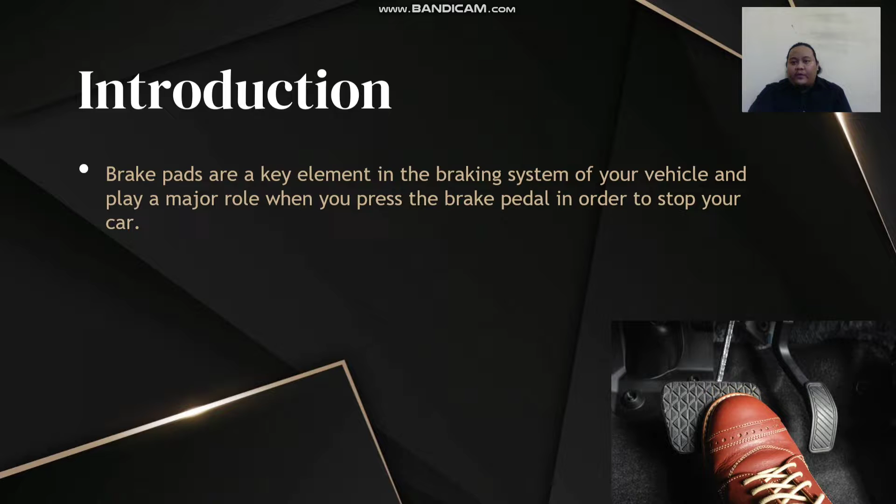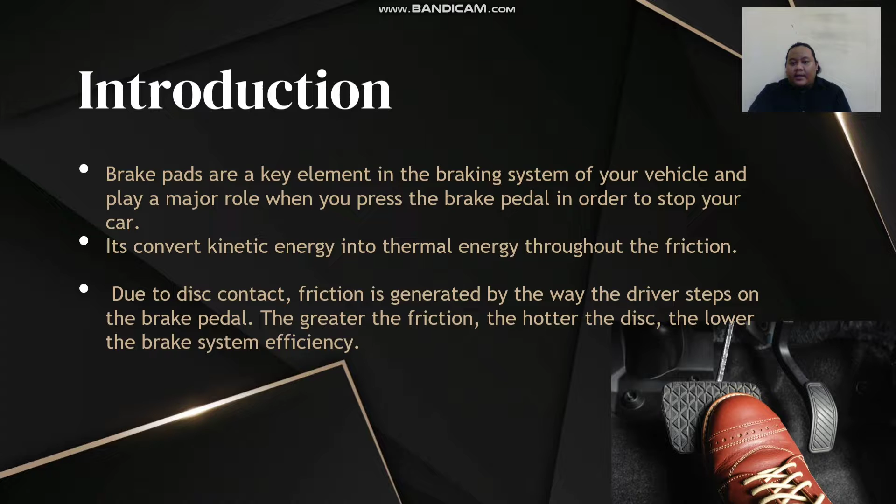Brake pads are the key element in the braking system of your vehicle, and they play a major role when you press the brake pedal in order to stop your car. It converts kinetic energy into thermal energy through friction. Due to disc contact, friction is generated by the way the driver steps on the brake pedal. The greater the friction, the hotter the disc, the lower the brake system efficiency.

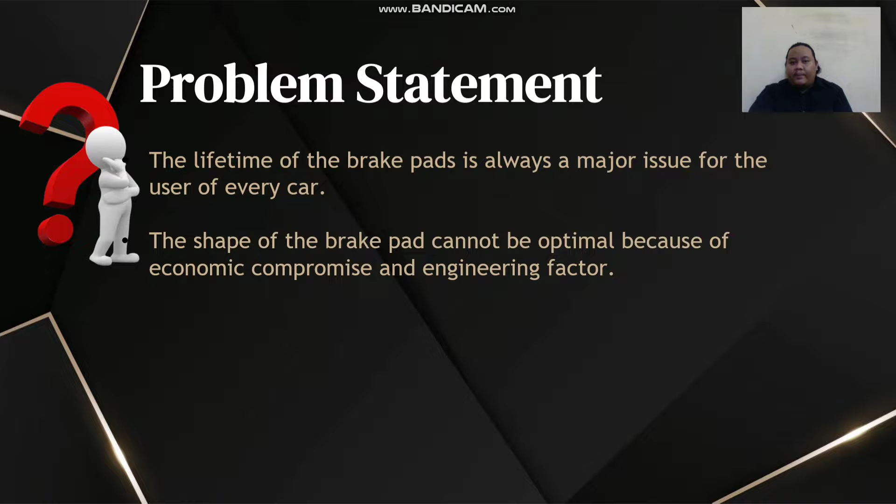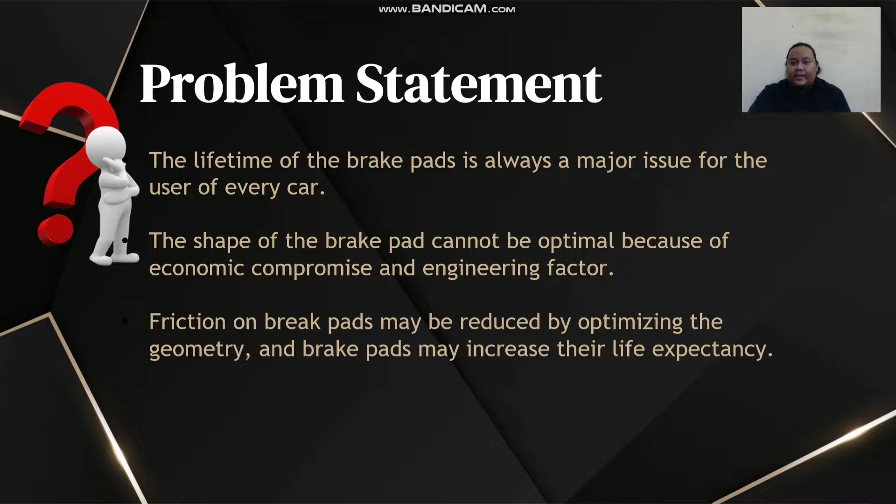Problem statement: the lifetime of the brake pad is always a major issue for every car user. The shape of the brake pad cannot be optimal due to economic compromise and engineering factors, and thirdly, the friction on the brake pads may be reduced by optimizing the geometry, which may increase the life expectancy of the brake pads. This project will analyze the 3D printed brake pad in terms of performance.

The objectives of the project consist of three. First is to design and analyze the lightweight 3D printed brake pad using CATIA software. Second is to fabricate the lightweight 3D printed brake pad using the SLS machine. Third is to analyze the performance of the lightweight 3D printed brake pad in the SIMSOLID software.

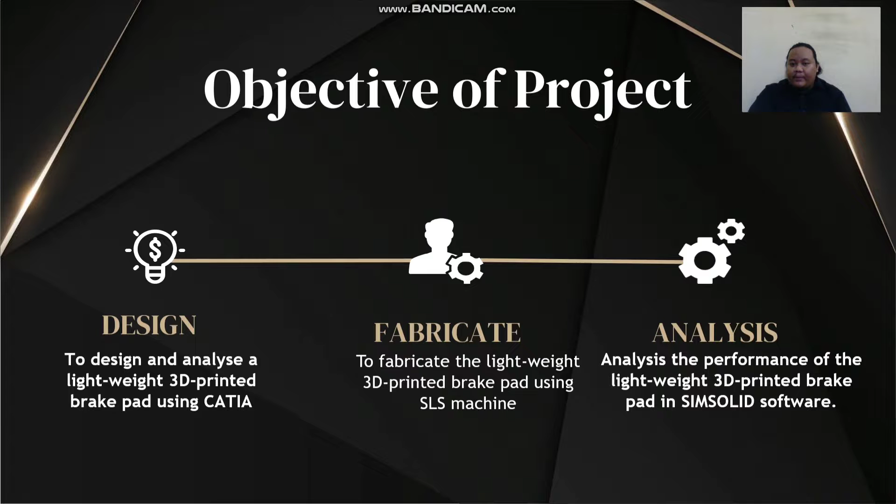Brake system: a braking system's purpose is to slow down and stop vehicle movement. Friction is the resistance to movement exerted by two objects against one another. In vehicle control, there are two types of friction: kinetic or moving friction, and static friction.

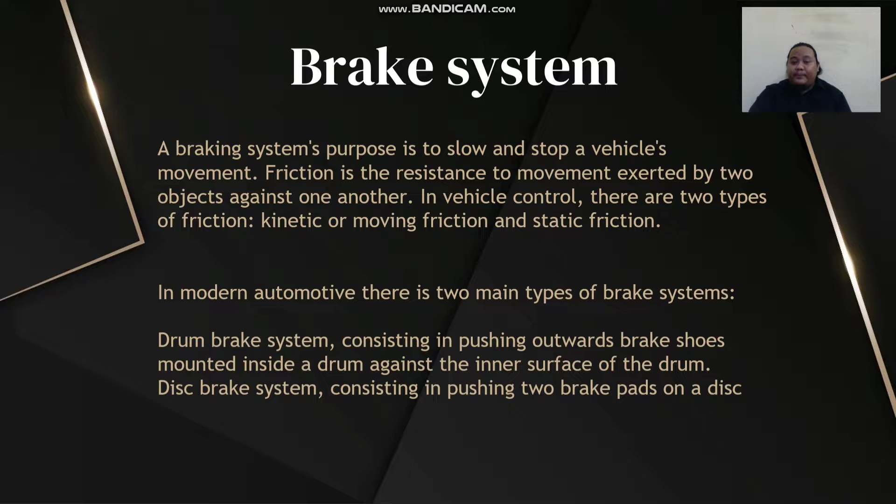In modern automotives, there are two main types of brake systems. First is the drum brake system, consisting of pushing outward brake shoes mounted inside the drum against the inner surface of the drum. The second is the disc brake system, which consists of two pads pushing on the disc.

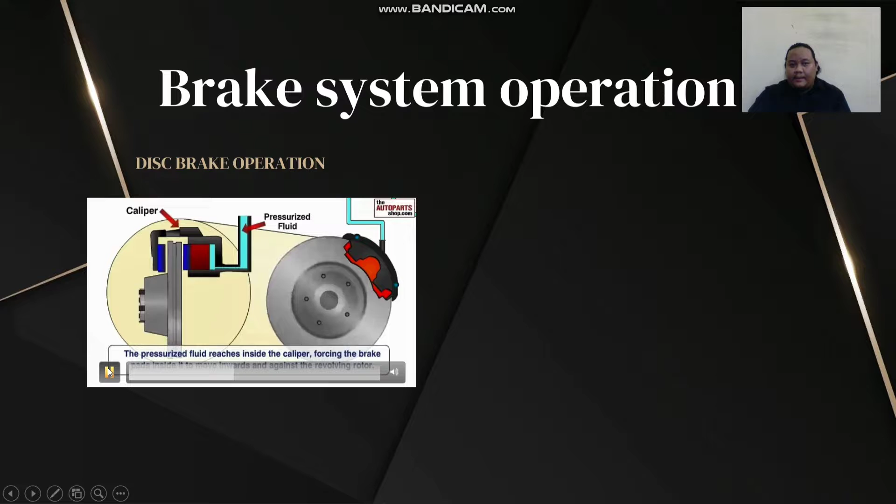Types of brake pad: there are many types of brake pads, such as semi-metallic, ceramic, non-asbestos organic, and low-metallic non-asbestos organic.

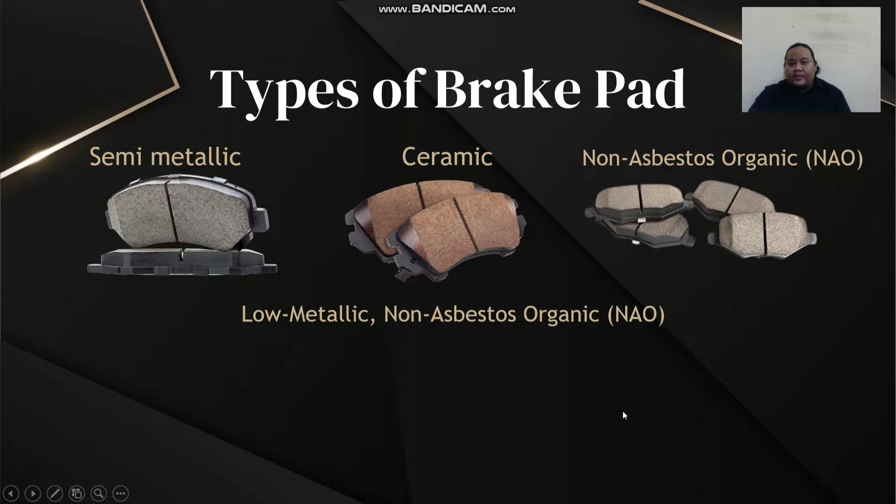Design and developing by using CATIA. General sketch for model: before designing the brake pad, the proper parameters must refer to the brake pad first. The CAD parts were designed to give a clear picture of what parameters need to be changed in order to reduce friction, using the real brake pad from a 1996 Proton Wira sedan.

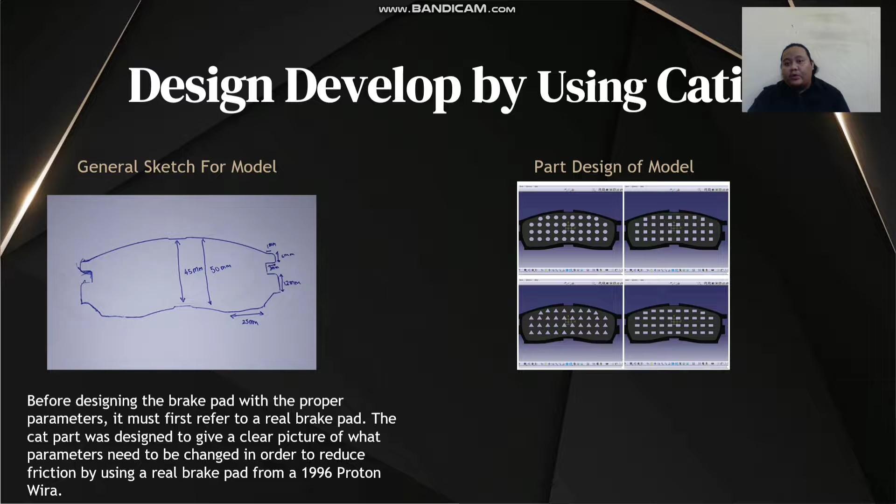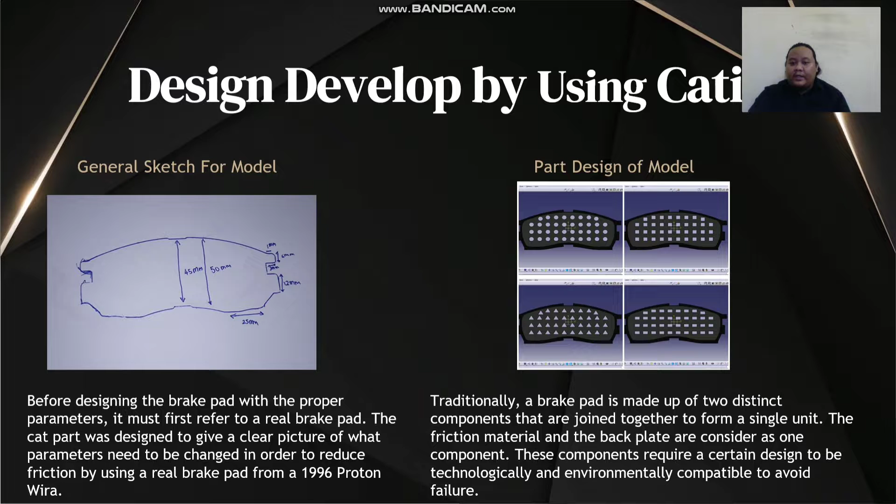Then we go to the part design of the model. Traditionally, a brake pad is made up of two distinct components joined together into a single unit: the friction material and the brake pad backing, which are considered as one component or one part in these CATIA parts. These components require a certain design to be technologically and environmentally compatible in order to avoid failure.

Fabrication of the model using SLS 3D printing. The printing process uses a powder bed that heats the powder just below the raw material's melting point, making it easier for the laser to raise the temperature of specific regions of the powder bed while tracing the model and solidifying parts.

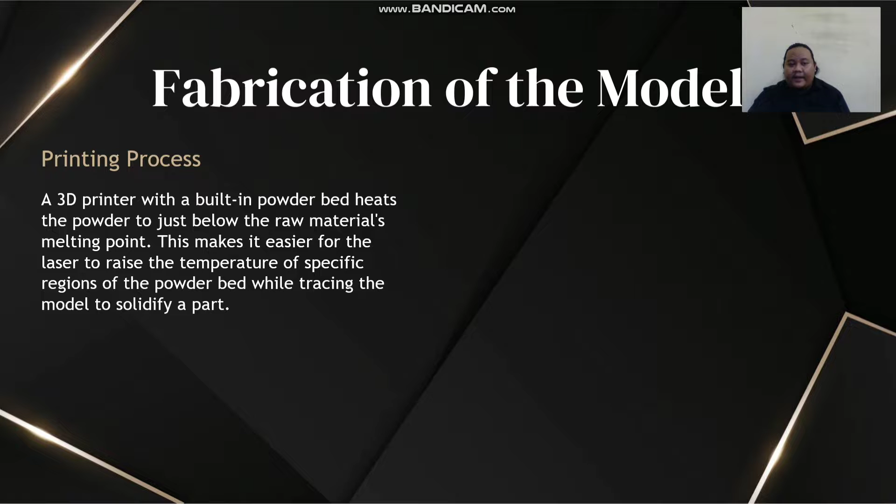The next process is cooling. The build chamber inside the 3D printer needs to be cooled slowly from the inside outwards after printing, to ensure optimal mechanical properties and to avoid warping in the parts. The exact cooling rate of each part is influenced by a number of factors, making it difficult to predict and measure. The last step of the preparation is the post-process.

After completing a printing job, remove the complete parts from the build chamber, separate them and clean them of excess powder. Typically, this process is carried out manually, at a cleaning station using compressed air and media blast.

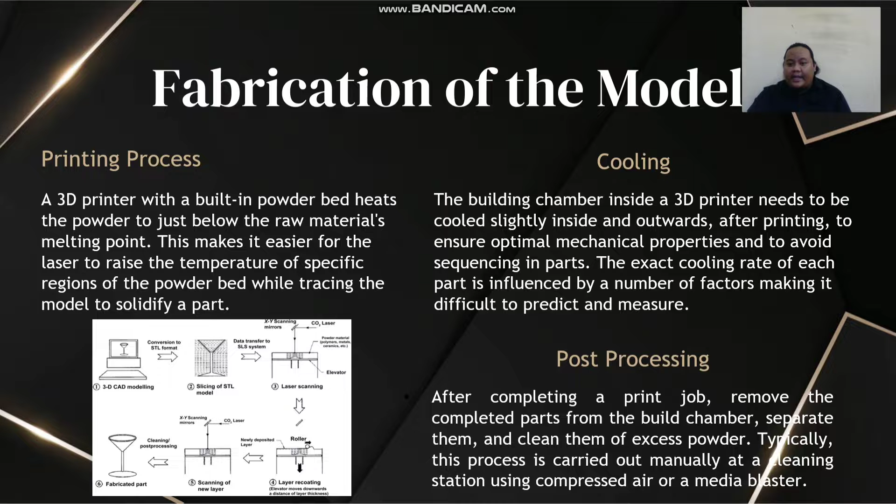SimSolid software allows quick simulation of various design possibilities under actual situations, and this virtual testing improves quality while reducing the cost of various prototypes, physical testing and reworks. SimSolid allows for fast iteration on the full feature assembly design.

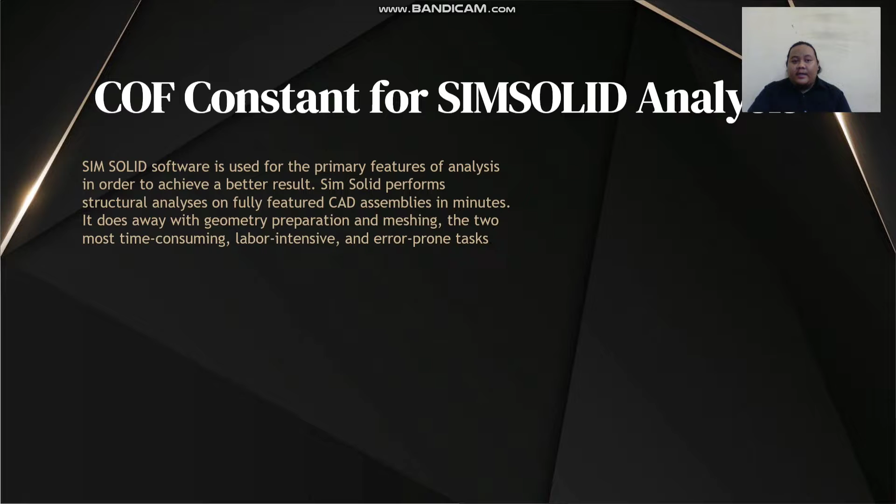COF constant for SimSolid analysis, the software is used for the primary features of analysis in order to achieve a better result. SimSolid performs a structural analysis for the fully featured CAD assemblies in a minute. It does away with geometry preparation and meshing, the two most labor-intensive and error-prone tasks.

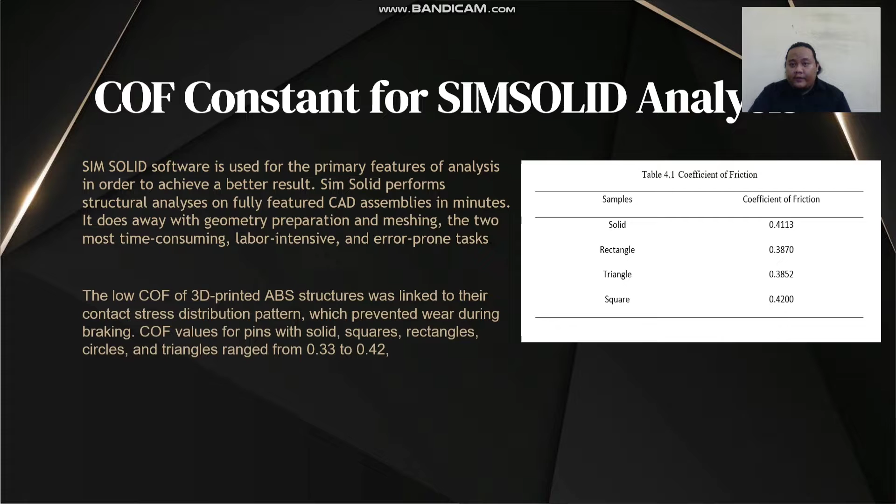The low COF of 3D printed ABS structures were linked to the contact stress distribution pattern, which prevents wear during braking. COF, or coefficient of friction, values for pins for solid, square, rectangle, circle and triangle range from 0.3 to 0.33 to 0.42. This is a table of the coefficient of friction that was given.

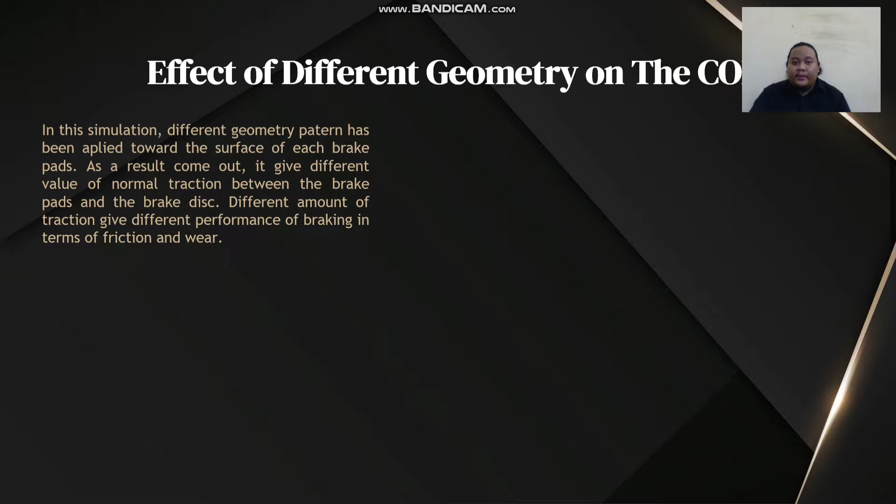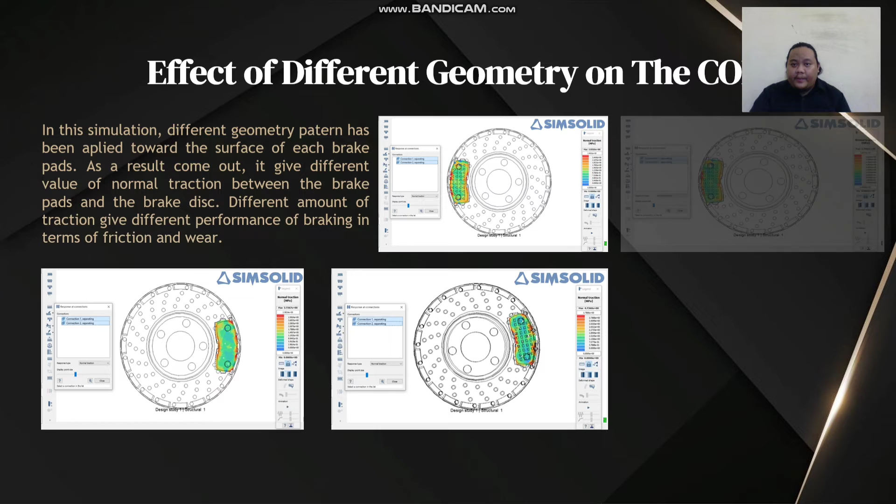Effect of different geometry on the COF. In this simulation, different geometry patterns have been applied to the surface for each brake pad. As a result, it gives different values of normal traction between the brake pads and the disc. Different amounts of traction give different braking performance in terms of friction and wear. This is a result of the simulation for all the patterns, including the solid patterns.

The data that illustrates the stress distribution indicates the solid brake pad, rectangle brake pad, triangle brake pad, square brake pad, and circle brake pad samples. The color red represents the highest stress location, while greenish indicates moderate stress, and blue indicates the lowest stress location.

The geometry has an effect on both the finite element analysis result and the coefficient of friction. Different geometry patterns give different results of traction. The brake pad with the rectangle geometry pattern has the highest amount of traction, which indicates it has the worst traction compared to others.

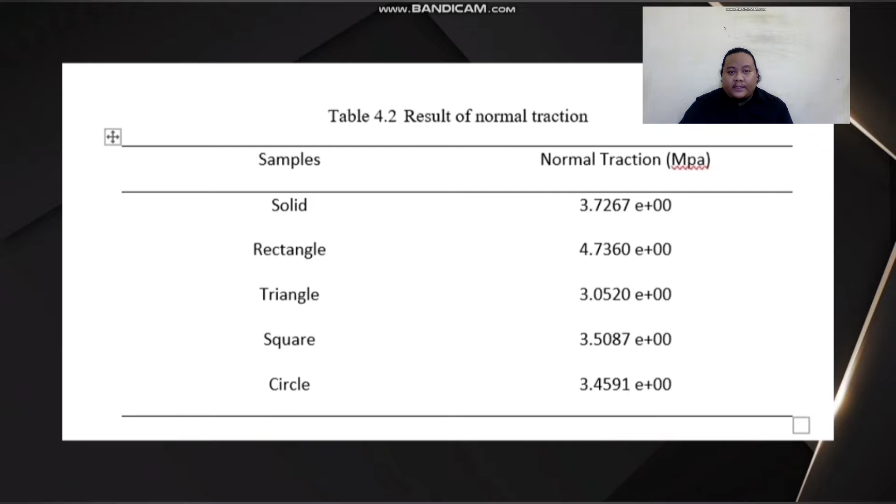As the data shows, the rectangle brake pad has more red spots, indicating higher stress, and fewer blue spots, indicating less stress.

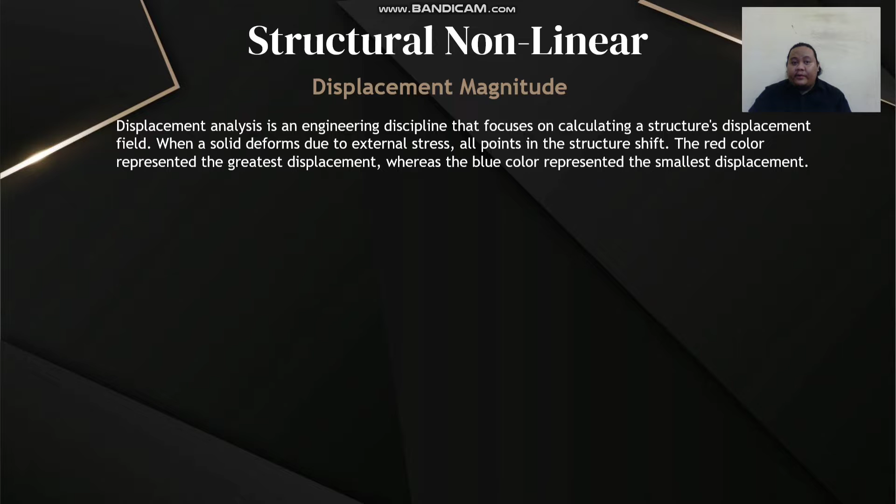SimSolid simulation consists of structural non-linear analysis, which can give data on displacement magnitude. Displacement-based analysis is an engineering discipline that focuses on calculating a structure's displacement fields. When the solid deforms due to external stress, all the points in the structure shift. Red color represents the greatest displacement, whereas blue represents the smallest displacement.

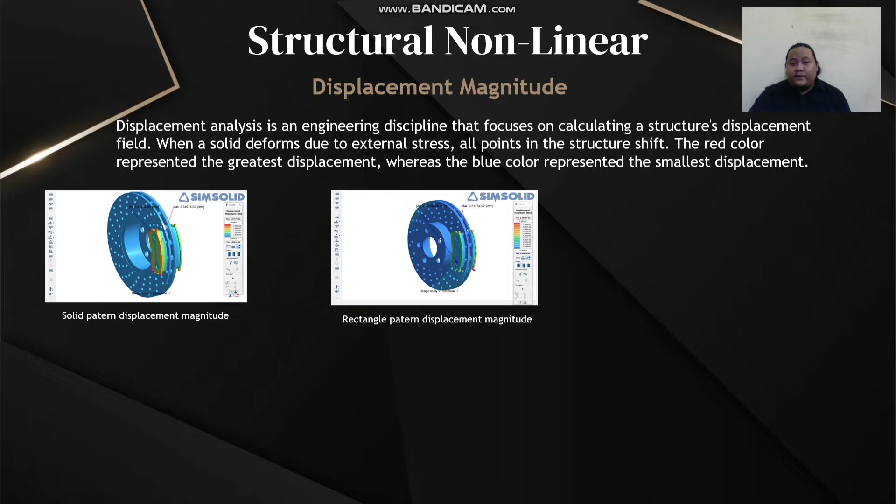Results of all displacement simulations show that the circle geometry has the highest amount of displacement, meaning it has a greater tendency or possibility to fail, while the solid geometry has the lowest amount of displacement, giving it a tendency to fail less.

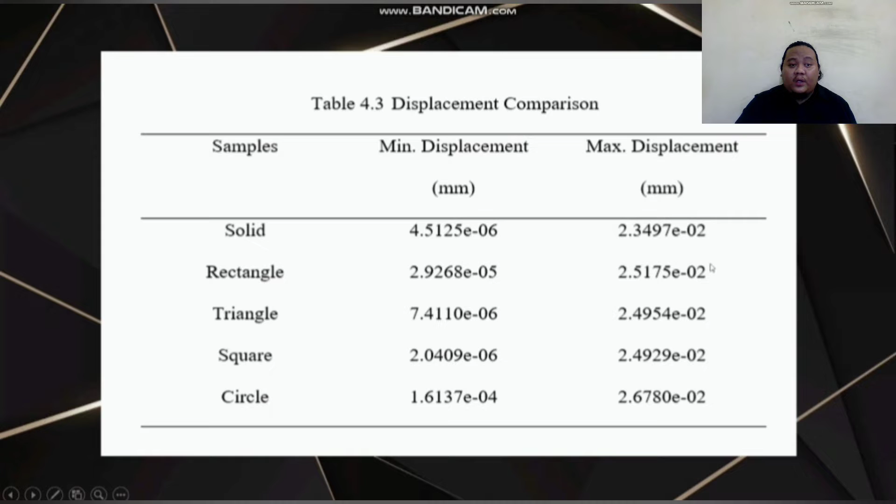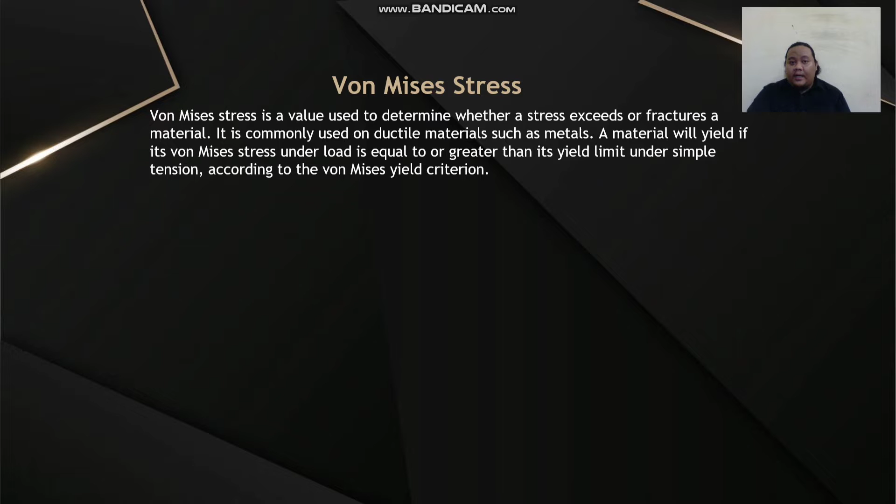The next simulation result is Von-Mises stress. Von-Mises stress is a value used to determine whether stress exceeds the fracture point of a material. It is commonly used for ductile materials such as metals. The material will yield if the Von-Mises stress under load is equal to or greater than its yield limit under simple tension, according to the Von-Mises criterion.

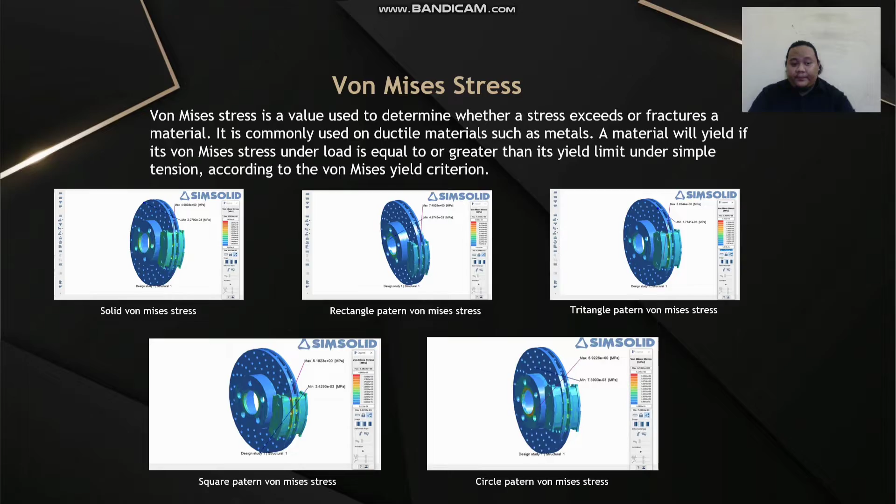This is the result of the solid Von-Mises stress, and this is rectangle, and this is triangle, and this is square, and last but not least, this is the circle pattern of the Von-Mises stress result.

In the Von-Mises simulation, the result was different from the displacement magnitudes. This is because the data showed that the red spot representing the highest amount of Von-Mises stress was on the brake disk instead of the brake pads.

Most of the affected area was greenish and blue, representing moderate and low values of Von-Mises stress. As you can see, the rectangle pattern has the highest amount of Von-Mises stress in megapascals.

It is an average of maximum von Mises stress, and the solid geometry has the lowest value, which indicates that solid geometry has a lower chance of failure.

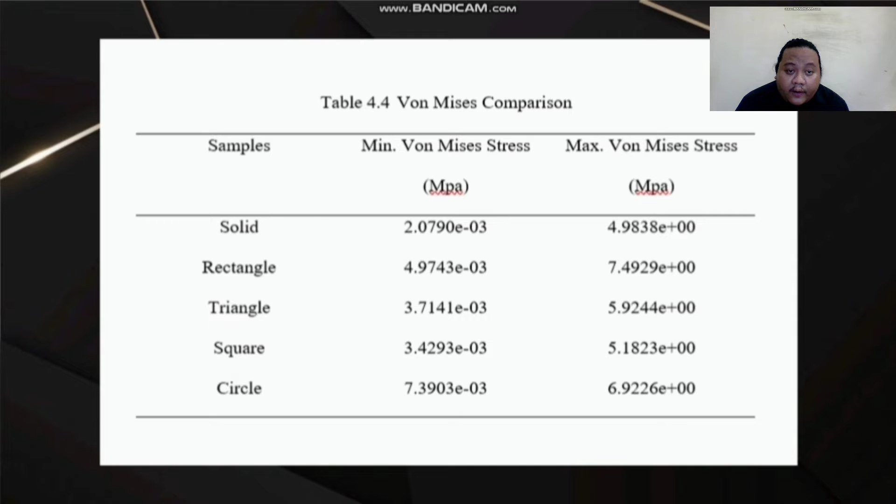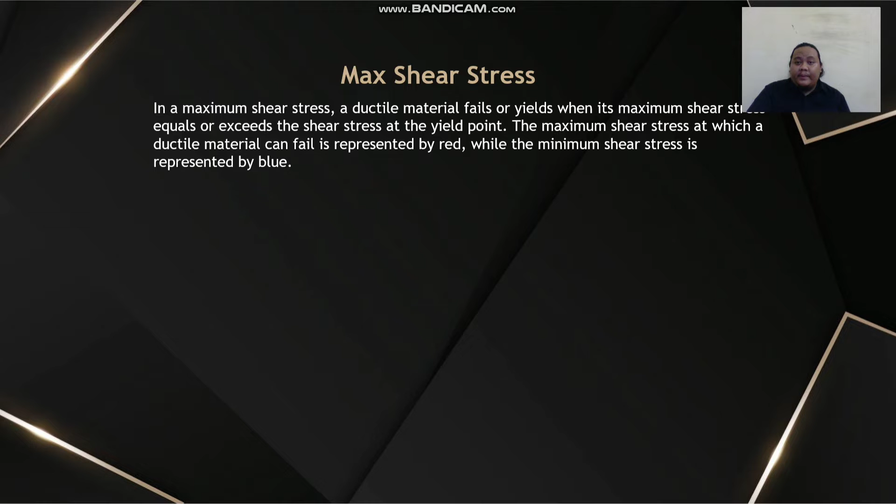The last simulation of SimSolid is the maximum shear stress. In this test, a ductile material fails or yields when the maximum shear stress equals or exceeds the shear stress at the yield point. The maximum shear stress at which ductile materials can fail is represented by red color, while minimum shear stress is represented by blue color.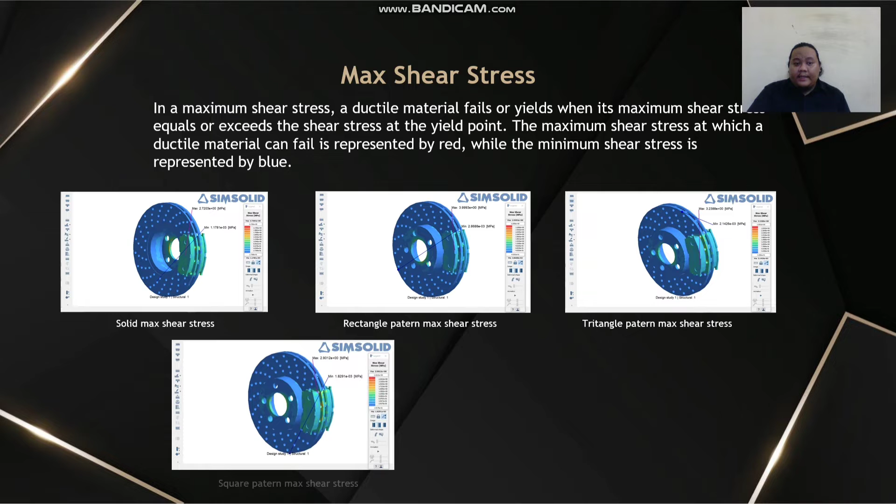As you can see, this is the result of the solid's max shear stress, this is for rectangle, this is for triangle, this is for square, and likewise this is the circle pattern for the max shear stress.

In this simulation, maximum shear stress is represented by red color, but same as the previous simulation, the most stressed area wasn't formed by the brake pad, but by the brake disk. This is because the simulation detected the most area affected when it was rotating the brake disk, producing maximum shear stress more than the brake pads. The brake pads are more likely grayish and blue in color, which indicates a lower von Mises value.

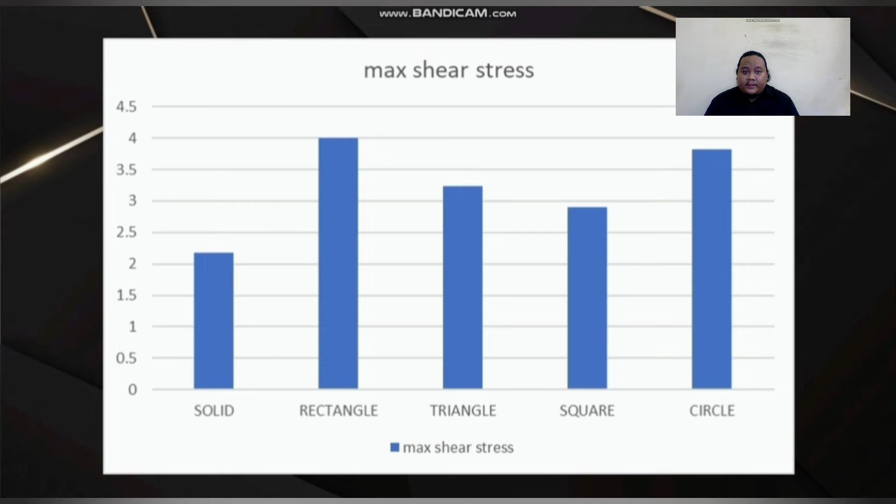If you come to the rectangle geometry, the solid geometry has the lowest value of maximum shear stress, and the highest max shear stress value is from the rectangle geometry.

Product readiness can be a very crucial part after all the processes in making these products. Some applications might perform well in certain situations, so the parameters must be set or differentiated to compare each kind of product. Given a scale from 1 to 5 to represent the performance of the printed brake pad, scale 1 indicates poor performance and 5 indicates excellence.

The solid geometry can be represented as a kind of real brake pad, with other geometries applied toward the surface. Solid geometry dominates most simulations, but solid geometry scales 2 show a normal traction, meaning other geometries have the same performance as solid geometry.

The square geometry has a very outstanding performance, with good scales more than other samples, meaning square geometry was the best geometry compared to others. Rectangle somehow shows 3 bad results of performance, making it the most not relevant geometry to be applied on the brake pad.

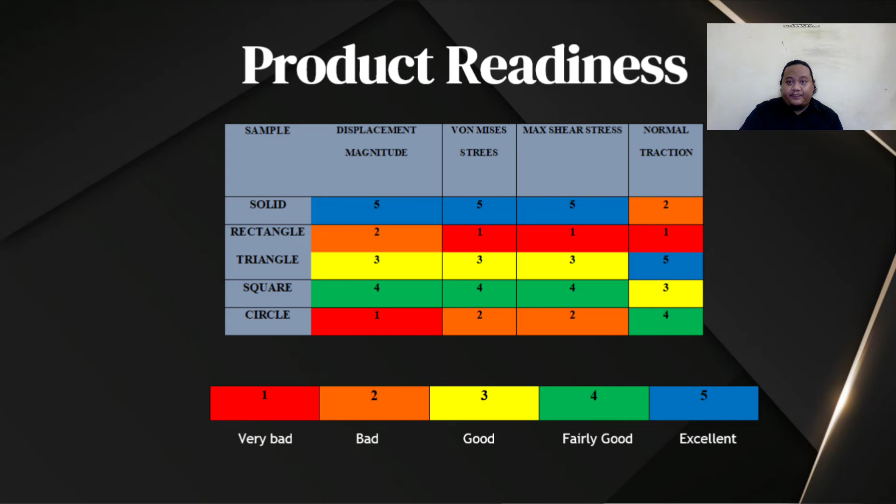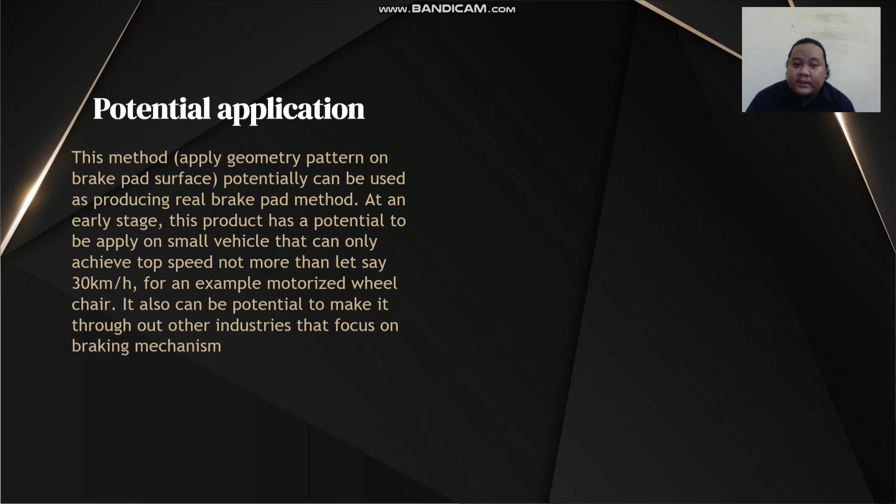We move to the potential applications. This method applies patterns on the brake pad surface, potentially usable as a real brake pad production method. At the early stage, this product has potential to be applied to small vehicles that only achieve top speeds not more than 30 km per hour, for example motorized wheelchairs, and also potential for throughout the industry with a focus on braking mechanisms.

There are some product improvements for this. This product can be improved in terms of adding geometry patterns such as hexagon patterns, which are believed to be a better geometry than other shapes or patterns. For the next improvement, the printing method of this product can also be upgraded by using the SLM printing method, which, as more data is collected and analyzed, will give more information compared to each brake pad model.

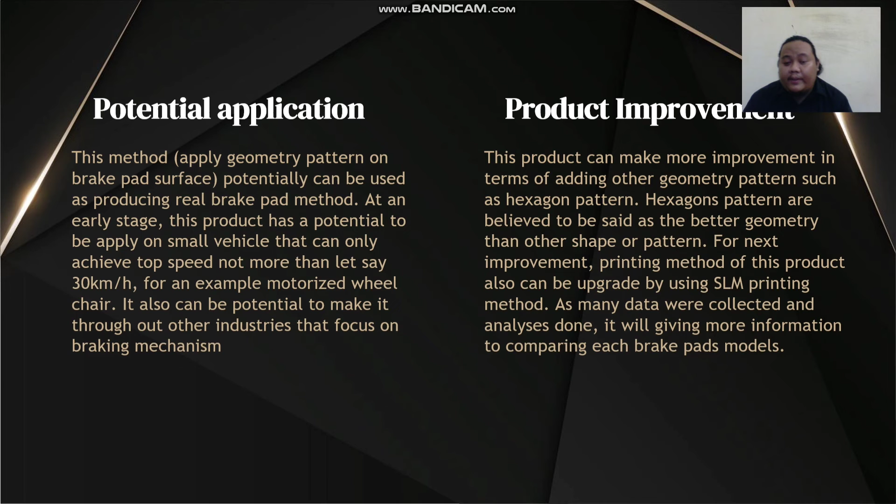A team of researchers have been studying how different shapes and sizes of geometry affect the performance of brake pads. According to the findings, the addition of geometries toward the surface of the sample affects and changes the parameter structure. Some of the geometry brake pads were printed but not in the optimized condition as expected, simply because the application made by nylon is different from real brake pads.

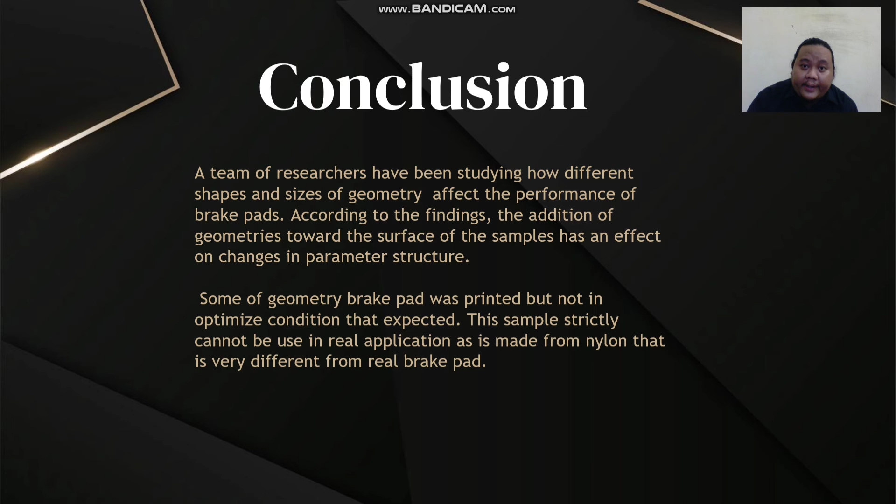And with the combination of all the future development and data, the project can be evolved. Here are some suggestions for this project in the future.

First is to conduct real physical testing using SLS, or test it through actual machines as a real brake pad. Second is further research on the slot or chamfer designs to be added with geometry applied at the surface of the brake pad. Last but not least, considering new types of materials for the same fabrication method.

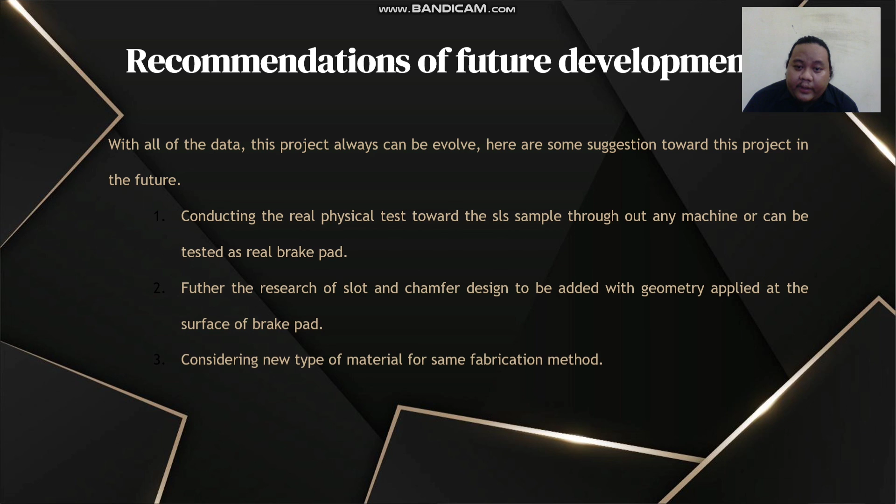Okay, that's all for me. Thank you very much for giving me time. I hope you have a very nice day.